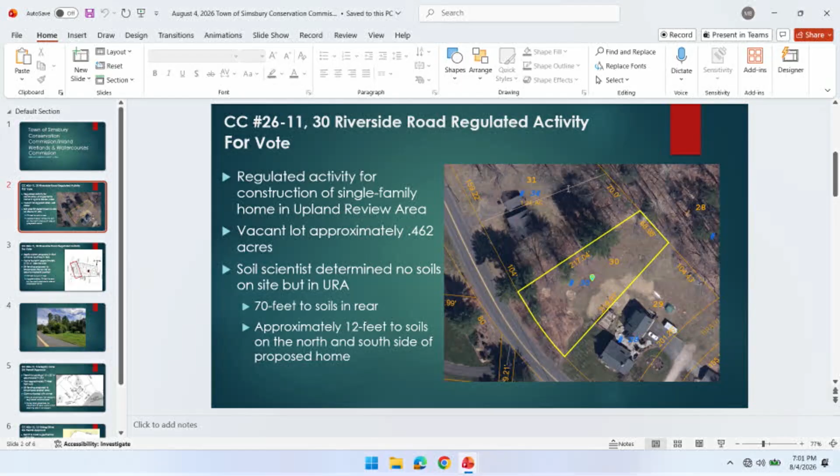So on July 21st, this activity was determined non-significant for a single-family home on Riverside. If you'll recall, it was associated with a map amendment for the wetland soils because there were no soils found on the site. The site plan submitted shows the septic system, the home, the silt fencing, as well as where the proposed stockpile is. So tonight is the official vote on it if there are no further discussion.

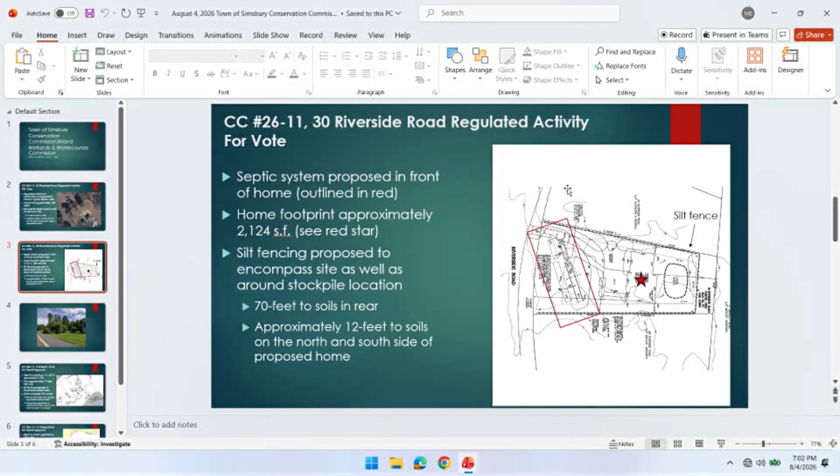Do you have any questions on this application? I can't tell from the air photo, but are there any invasive plant species on the site? So there's the photo of the front of it, but we can condition removal and planting of natives. Yes, we encourage the planting of natives, as we do with all our applications. Yep, that's item 2. Oh yep, that was number 2.

There's a motion at your dais. And speaking of that, it says native planters will be planted and invasive species will be removed from the property. Could we change that to 2 sentences? So, native plants will be planted, invasive species will be removed, so it's not connected. Yes, all right, yep, thank you.

All right, any further discussion? All right, I'd entertain a motion, which we have before us.

Moved the Conservation Commission approves application CC 26-11 of Michael Medeiros, owner and applicant, for a wetlands permit to construct a single-family home in the upland review area at 30 Riverside Road, assessor's map, block lot H12-107-130, zone R15, based on the following findings: short-term impacts from the proposed activity will be controlled by installation and maintenance of erosion and sediment controls, and subject to the following conditions as listed in the motion.

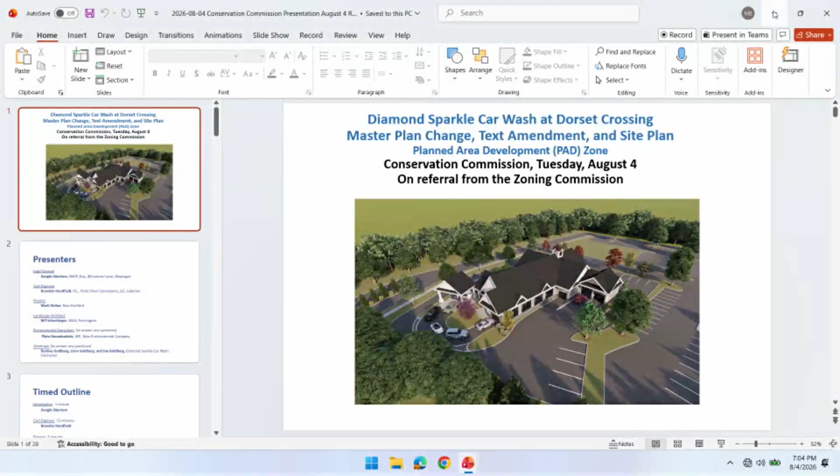All right, thank you. So moving on to conservation business, we have a referral from Zoning Commission. The Zoning Commission's number 26-18, an application for Dorset Crossing LLC, owner, Dwight Merriam, agent, pursuant to Section 8 of the zoning regulations for a zone change and amendment to the master development plan to allow a car wash facility at 10 Dorset Crossing, assessor's map, block lot I-04-403, 13C-F, Planned Area Development, PAD Zone.

Just a few thoughts before the applicant presents. So this, as mentioned, is a planned area development application. It includes 2 applications: one, the amendment to allow the use on the pad, as well as a site plan associated with it. It originates with the Zoning Commission. Then the Zoning Commission, as part of the pad approval process, refers it to a number of land use agencies, Conservation Commission being one of them.

So you will make... there's not clear language on whether you have to make a positive referral, negative referral, suggestions, or conditions, but there should be something, a motion of some sort at the end about what you want to pass on to the zoning commission.

Did they have a specific question that they wanted us to address? No, it was all environmental matters for the site. And I know that the zoning commission is the aquifer protection group. They are, yes, but it's not considered a regulated activity under the Aquifer Protection Act, because the wastewater is going to be contained within the facility, and it's going to be sent to the waste treatment plant.

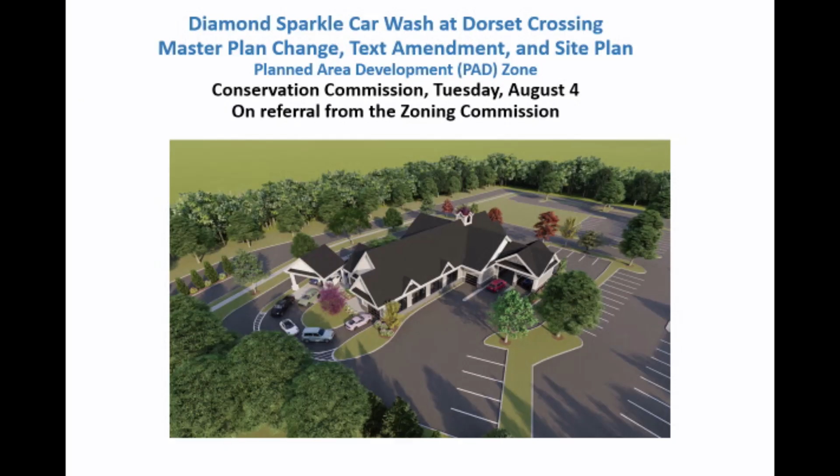And I'll sit down here in a minute, but let me first apologize to the audience again for turning my back on them. We've seen many of these folks. This is now our 8th meeting on this project.

No sending it back, but we had a pre-application meeting with design review and with zoning. Then we had a preliminary meeting with planning, design review, and zoning. And then we had the last meeting, which is the formal application, which is now on referral to you.

As staff said, this is a referral on the master plan. The hearing is closed, but they are going to deliberate on September 9th. And the site plan remains open.

We've heard from the public. We have an idea what their concerns are. We know what your jurisdiction is. And there are 4 issues we're going to address, and we expect there'll be more questions and comments beyond that.

But our water supply, is Aquarion giving water to this project going to diminish the water to these residents?

Second, what about the carryout, so-called carryout water? Everything that's contained in the building is treated before it's discharged into the publicly owned treatment works. Outside the building, what has gone on?

We've done very deep research on that, and we're confident of what everyone else is doing. And if you've had an opportunity to read the voluminous information I've given you, because it was a real concern of the public, and you can't blame them for being concerned. But the fact is that water is treated as basically stormwater in a parking lot.

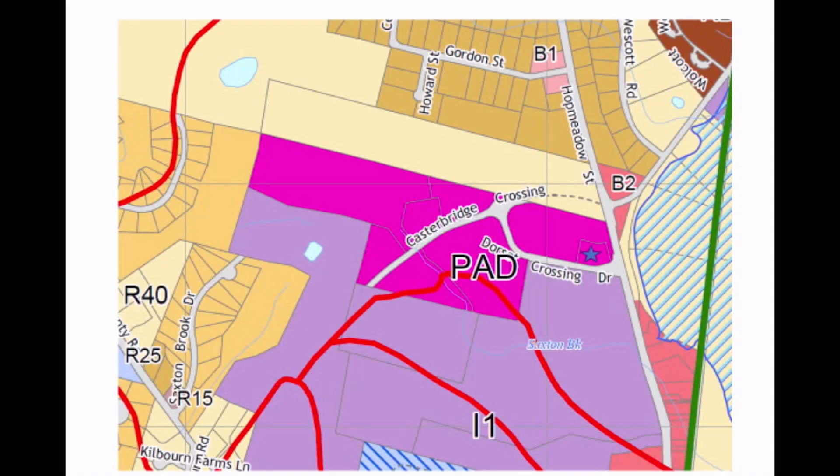Here's the corner as you go in where this car wash will be sited. It's part of the PAD, shown as that blue star. The PAD is that color, and the areas around it are zoned for business, just north of the Big Y and the other developments going on there.

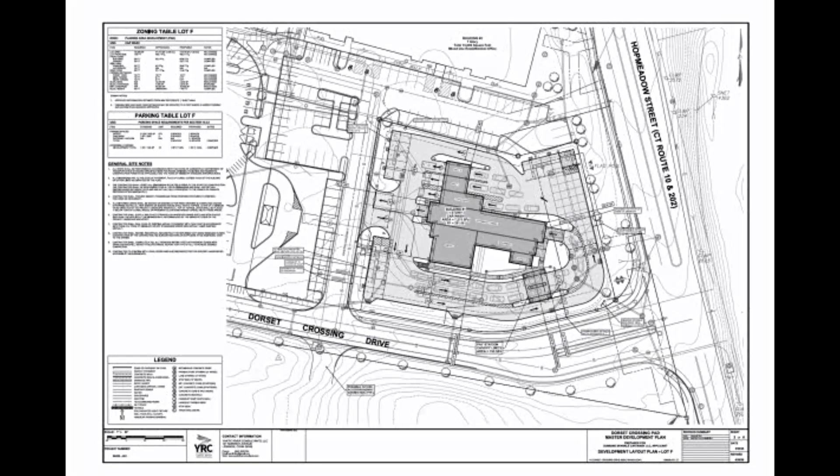Getting to the main part of the presentation, our grading and drainage plan. Before I get into the proposed drainage, I'll cover the existing drainage. Again, it's part of a PAD—I believe it was 2012 or 2013 when it was originally approved and construction started.

As part of that, Dorset Crossing was constructed—this driveway, the building up here, and all this parking you see in this area. As part of that, they installed drainage for Dorset Crossing, and most of that drainage is located on this site.

So right here you have an underground system called a retain-it system. It is a lined system with a Durascrim liner, so it does not infiltrate—it simply stores stormwater. It collects stormwater from Dorset Crossing here all the way up to about here.

As well as this catch basin here, here, and here—those catch basins all currently exist on the site, kind of just floating out in the middle of the lawn. There is also a treatment structure right there, a hydrodynamic separator designed to treat the water quality flow from all the impervious surfaces in the watershed draining to it, which includes part of Dorset Crossing Drive and what was planned for development here. So all of that stormwater exists on our site.

In terms of our proposed stormwater system, we are keeping that existing system. This catch basin stays, this catch basin stays, all of these structures stay, the underground system stays. There's also a catch basin here, so all of these go into this system. This single catch basin here goes west.

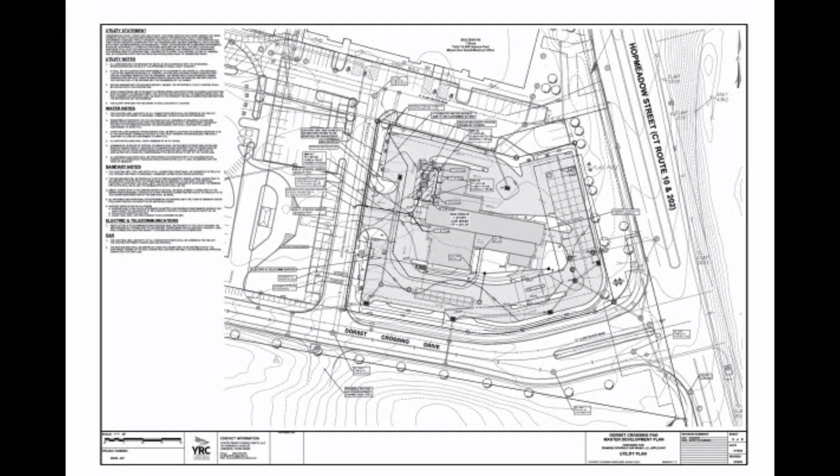All right, erosion sedimentation controls. I think that's pertinent to our design. The site is relatively flat and currently grass. The main thing here is making sure that our construction stormwater does not get into those existing catch basins.

So we made a concerted effort to make sure there's a sizable siltation trap along the southerly border, so all the flow goes north to south, and it will be collected in those siltation areas, which will allow the sediments to fall out before it's discharged. The discharge point here will have appropriate filters for that water that comes out. And just for the record, it does comply with the 2023 erosion control and sedimentation guidelines.

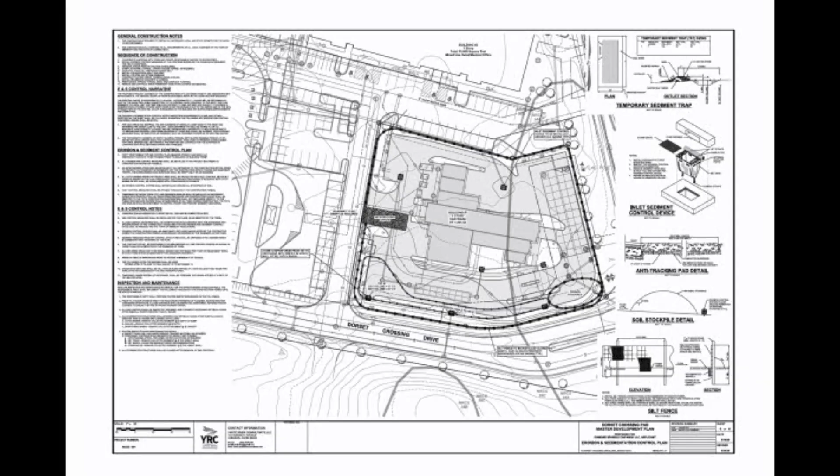In my analysis, there's a little bit of creep there, but again, this is part of a PAD, so this was a common development, including driveways, utilities, and lighting. There are light fixtures here, here, and here that light up the driveway and the adjacent property that are actually on this property. So achieving 0.5 foot candles over common boundary lines is quite difficult when we have lights shining on another property for us.

The lights themselves will turn off or be reduced in power by 75% when the facility is closed. I don't have the hours on me, but I believe the main tunnel operates 7 to 7, and the touchless and self-serves will be open 2 hours earlier and 4 hours later. So there will still be lights when the automatic tunnel is closed, but after 11 p.m. the lights will turn off or go to 25% of the power output.

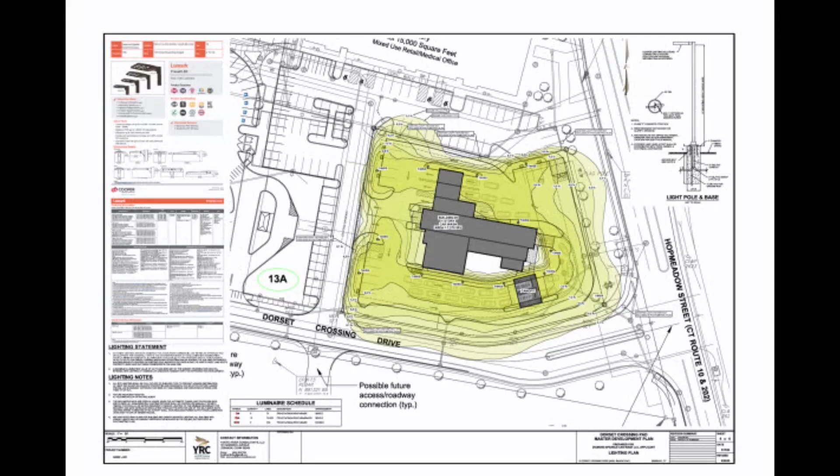Okay, and then we're working with Apex now on a design where they can go down, and if someone comes on the site to use those facilities and they're not manned, the lights will turn on. Okay, so the motion sensor? So a motion sensor with a timer on it that would dim it back down. Okay, good. So we are working with Sylvia Perdikis on that now to try to incorporate those controls into them, and I believe they're Bluetooth controlled.

Last item I will touch on is the aquifer protection. Again, car washes are on the list of regulated activities unless they are connected to a publicly owned treatment works. We will be connected to a publicly owned treatment works, so all of the processed wastewater associated with the car wash conducted indoors will discharge through the treatment system. Any excess flow will discharge to the sewer.

So all we're left with, and the regulation right here, regulated activity, G under 35, again says car or truck washing is regulated unless wastewaters, and I'll say all wastewaters from such activity are disposed. So the carryout was discussed at numerous meetings, and we have reached out to DEEP to get clarification because they obviously wrote this regulation, and carryout water or drip water as the car exits the facility is just part of a car wash. It's what happens.

So we contacted them to get clarification, and I got initial feedback that it's not a question that's been asked before. After further review, Attorney Merriam had communications with them when I was on vacation, and they provided us more clarification. I think it's in the packet.

The email response they provided to us specifically said that the wastewaters, or processed wastewaters, that are conducted inside of the building to wash the vehicle, as long as those processed wastewaters are collected and discharged to the sewer, that complies.

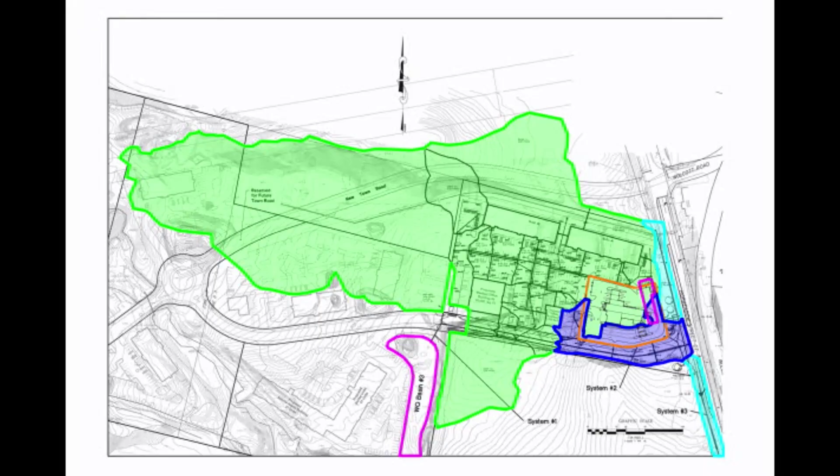I also have a question. We're worried about the trace water and all that, that's fine. But there will be a large volume of chemicals and substances on site, I'm assuming, because we've already talked about rinse agents, soap and detergent, and I think there's wax, Simonized wax. How is that stored?

Any leakage from that toxic material concerns me, because we're over a protected aquifer, a Class A aquifer. I would find that very concerning.

I haven't seen this operation yet because it's not built, but the way this is designed, they have an equipment room which stores the chemicals. You'd see a large quantity, something like 2 to 8 drums total, some 35-gallon, some 55-gallon drums.

Besides the LEP, I'm a hazardous materials manager, and one of the things we deal with especially is oils. In this case there's no oil, so there's no reason for a spill prevention control and countermeasure plan. But when it goes for permitting under the car wash permit, which is a wastewater permit, there's a requirement for a spill prevention and control plan, which we've already talked about we'll have to get for this facility once it's approved.

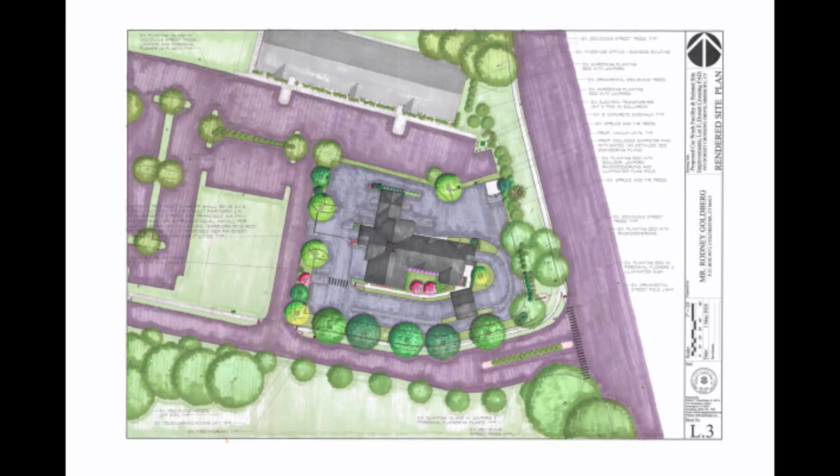Also, if you want to get into the argument, and this is something I think you should be aware of, we're starting to see forest creep. I'm seeing, and nurseries are carrying stuff that I didn't see 40 years ago - I've been in the business over 40 years. But the point being, now they have not only great variety, but also things we wouldn't consider native to Connecticut, but are native now because they're native to Pennsylvania and the Appalachians, and they're here now. We grow sassafras, yellowwood, and other things you wouldn't get commercially in Connecticut, especially northern Connecticut, 40 years ago. So you're going to see what's native and what isn't, and what's adjacent. Then you can run it by Connecticut. The Ag Extension put out a great document - I'll send it, I send it to planters - it documents all the plants used in nurseries in Connecticut, highlighting if they're native or not, if they're threatened or not, if they're native but not to Connecticut, if they're native to the East Coast or Appalachia or something. So what we consider native is migrating and mutating even as we speak because of climate change.

My concern was with that particular one, because what a strange name for an East Coast plant. I know some of our East Coast plants run amok out in the Pacific, and some of the plants from the Pacific run amok here. It's like people call the green giant arborvitae native, but that's a Pacific plant. Yeah. So who knows what will happen.

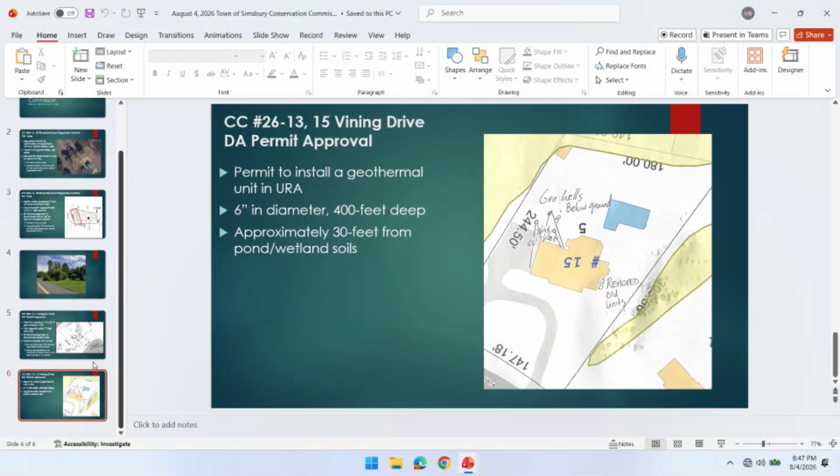On the pool conversation, are those handouts that you're giving people? So it's an email right now. It exists as a PDF that you can send people as a reference? I don't have a reference, it's just sent to the pool company and the homeowner. I don't know if there's a handout for that.

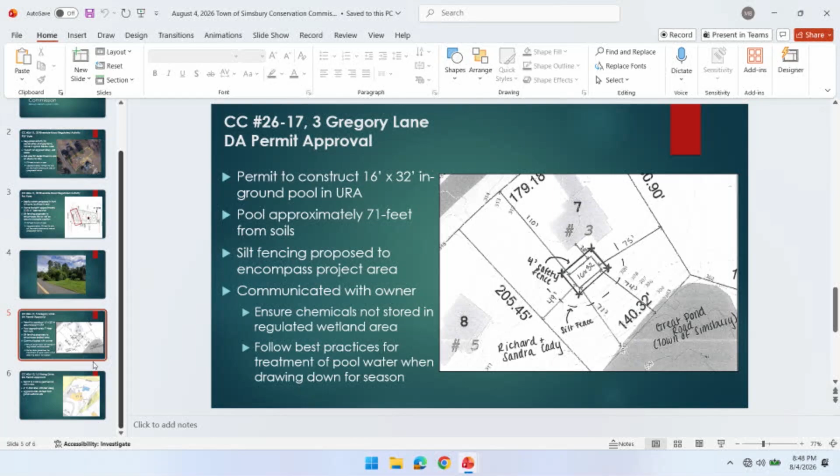This works really great, this is a great lead-in. One of the things I'd like to do when we're not busy solving world hunger is look at the documentation we do for conservation issues, and make sure we institutionalize this and get it into things we can hand out to people. I'm particularly worried, Marjorie, that if for some reason you lose your voice and aren't here to go after people on the natives, we want to institutionalize all that and get it into documents. I think that's what we're going to be doing, getting it into the zoning regulations.

Much of this will be, but things like the pool, if there's best management practices. For instance, for the recent applications we had for the brook banks, we produced a one-pager that I can now send to people. Something like that for pools too, and we can think of different categories.

Which is what I really want to do. I know there'll be a case where things go into regulations, but when we're handing things out to homeowners, it's that discussion. Every time we give a talk to an applicant here telling them, let's do mowing 12 feet away from the base, the buffer—if we're saying it more than 3 times a year, it should be on a piece of paper.

Well, we do have the invasive plant guideline, which has been flying off the shelves at town hall. We need to reprint those. Maybe the town would like to help the Simsbury Land Trust do that.